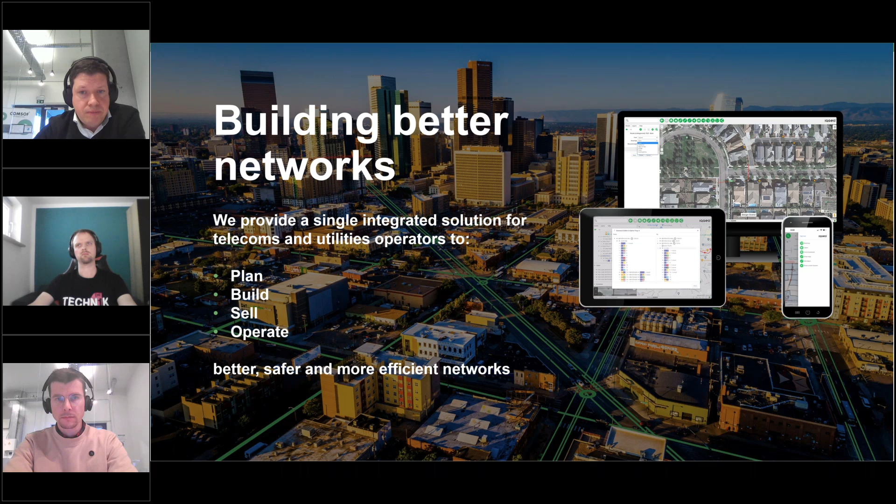Now, for those who are also familiar with Comsof as a company and as a brand, since August '22, IQGeo and Comsof have joined forces. Given the fact that our technologies are very complementary, this now fits into this end-to-end lifecycle story, being one company now with a broad set of solutions, where the Comsof brand mostly reflects the automated design solutions.

As a joint company, we have more than 450 customers across the world and more than 100,000 users that are daily using our software, something we are very proud of. We have more than 300 employees spread across our 8 offices around the world.

I think what differentiates us from some other companies is that we really come from a real understanding of the networks and the support of the workflows. We start from the business problem and look at implementing solutions to solve those business challenges, with a team that has a lot of experience in this domain, spanning the whole life cycle. It's also a system that is very modern, cloud-based, easily supporting mobility workflows, etc.

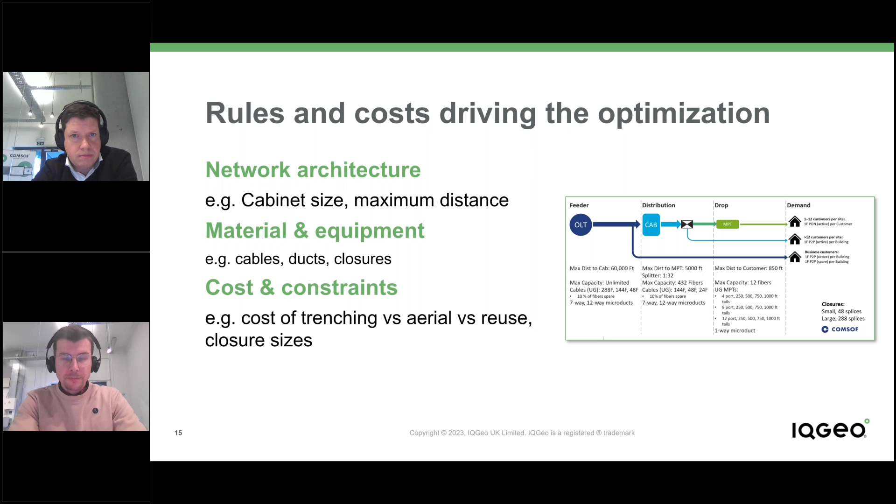And all of that information is considered by the software and is driving the optimization algorithms. Second point is the GIS data. So it's really GIS driven to get to particular detail in accuracy, particular level in accuracy, and it's also driving the cost of the design. So typical GIS input data that's required is land-based data like the addresses, parcels, and streets within your target area.

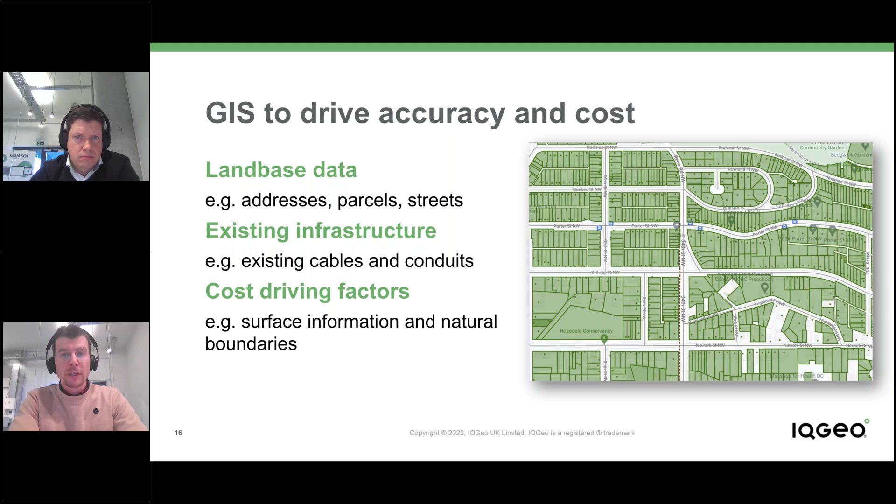Any existing infrastructure is a huge cost driver, as you'll also see in the presentation later on. Reusing existing conduits, existing cables, and structures is a way that costs can be lowered, so that's important that is also taken into account in the design automation. And then other cost driving factors like surface information, natural boundaries, all of that detailed information. The more detail that you provide it, the better the algorithms will work, and the more accurate the cost will be.

As a result of a Comsof fiber calculation, you get very detailed output from the solution out of the box. It gives you a cost breakdown, a complete cost overview of building out your new network, with detailed breakdown of all the equipment, civil works needed, together with volume and total cost. You can do a very detailed analysis and optimize your rules to drive down costs even further.

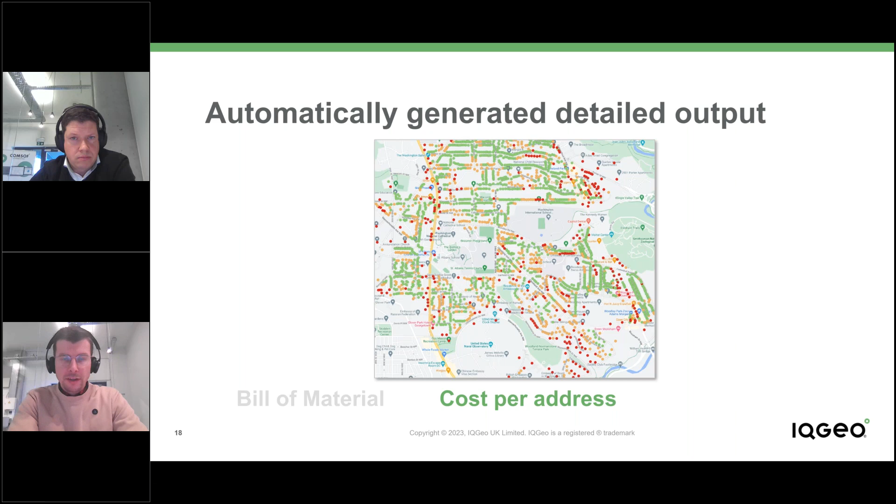This cost information can also be provided even for individual addresses in your target area, driving your decisions to maybe exclude certain homes from an initial rollout and connect them later on, to optimize the budget that you have for targeting a new area.

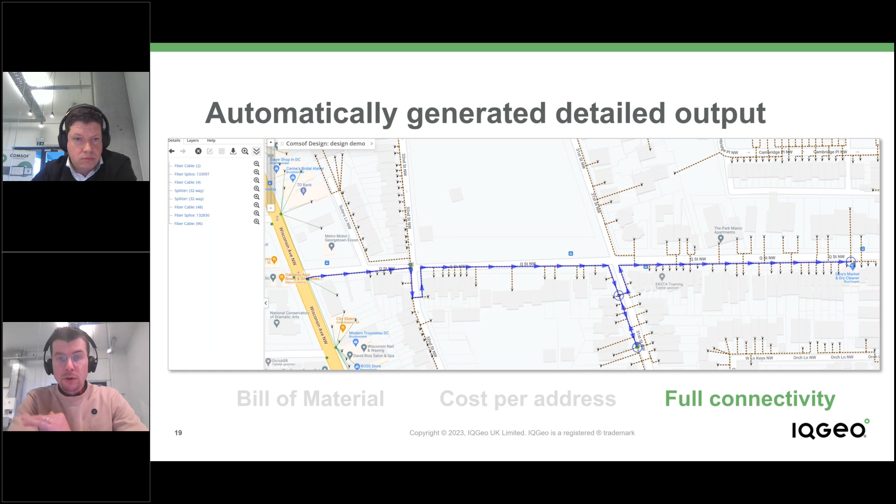What is very important, I think, and helps with increasing accuracy, avoiding errors, and gaining time, is that the output generated by Comsof Fiber is really a detailed design. There's fiber level connectivity allowing you to trace through the network. It's not only providing the equipment you need to build the network, but also which connections are required, like which fibers need to be connected to which other fibers, and which cables in which particular microduct need to be positioned. All of this can be taken into account by the software.

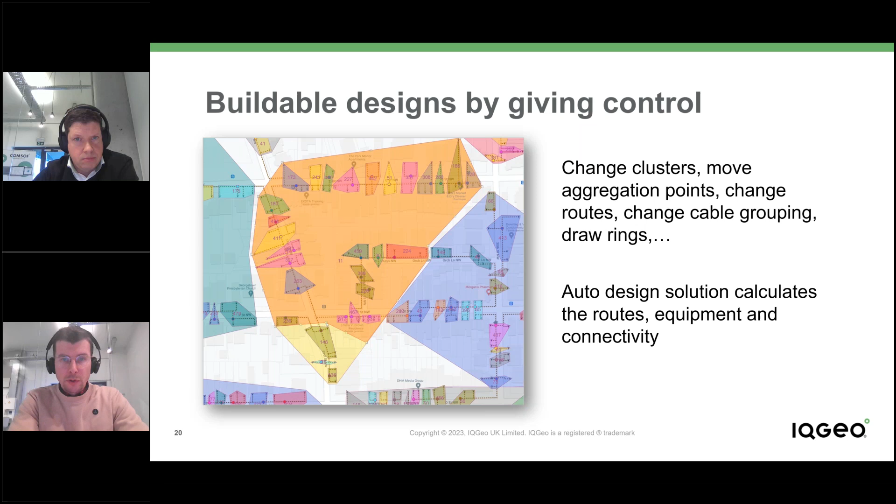Last point, which I think is a key feature when going to low-level design and constructible designs, is giving control to the user. Comsof Fiber is not a black box solution that gives you a design and you need to go with that. No, you can really have control. You can decide where your cabinet location needs to be, which homes are connected to which cabinet, and let the software then do the heavy lifting and decide the connectivity and all the equipment needed to connect all the homes you told it to connect. So you still have that level of control. It's not a black box solution.

With this functionality, we see with our customers that we're offering different types of value. First, it's a time-saving solution, compared to manual design, saving 50 to 90% time in the end-to-end planning and design process. The second point, which is really important, is generating cost-effective design, helping to reduce the build cost of your network, especially when looking to reuse existing infrastructure as efficiently as possible.

A third point is you get better designs - uniform designs. Quality is increased because you have a certain set of rules that need to be followed. If you're making changes to the design and not adhering to the rules, the software notifies you so you can adjust the design accordingly. It also helps avoid mistakes. When doing manual design, it's easy to miss a fiber or choose the wrong type of cable so that you cannot connect homes in a later phase. This is all taken care of by the software.

Lastly, it's cost control. Already in your design phase, in your planning phase, you get a very detailed view of your costs. All costs are generated or calculated based on a real network design following the rules, so the variation in cost between design and build is greatly lowered. You get a lot of confidence in the cost from Comsof fiber design compared to the cost it will take to eventually build the network.

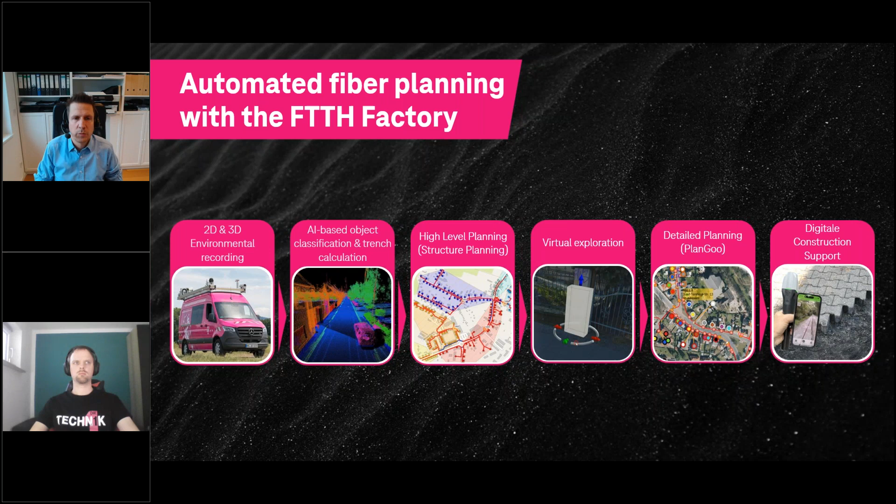Thank you, Bertolt. So our first step in our FTTH factory process is the 3D and 2D environmental recording. We currently have 4 so-called TCARs, the magenta car you see on the screen, driving around all of Germany. This car is equipped with a lot of cameras, GPS receivers, and 3D environmental sensors, so that all details of the construction area are recorded.

Sorry, it's slow coming up.

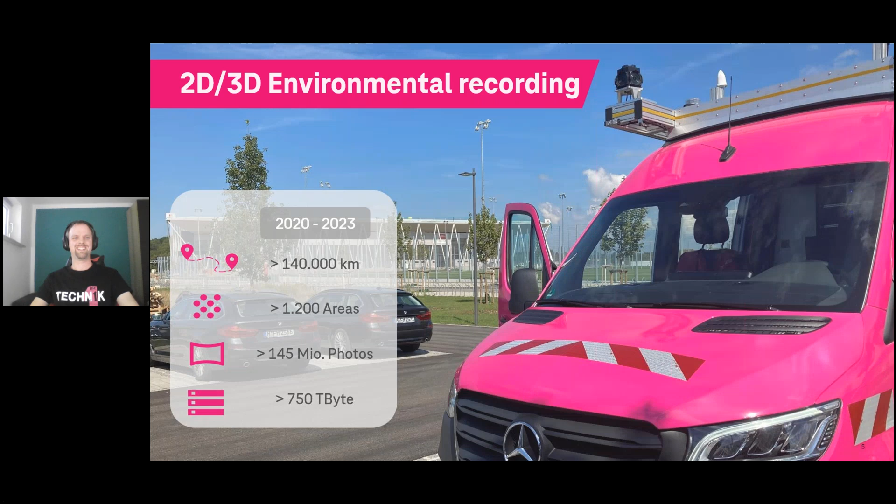Okay, so let's have a closer look at our automated network design, in which we use the Comsof Fiber Designer. The first step is to collect all the data gathered by the TCAR, and this data is processed in an automated way so that there's an automated classification of the surfaces, so we know on which side of the street which surface is present.

There are approximately 30 trained classes for that, for example asphalt, concrete, pavement. All these different surfaces are collected and identified by our automated process. Out of this data, we generate the so-called potential trenches, which are then later used by Comsof. These are the potential ways our FTTH network could be built inside one rollout area.

Of course these surface informations are written to the potential trenches, so we exactly know on which side of the street which surface is present, and how much that side of the street would cost. This information is then passed to our integration of the Comsof Fiber Designer, so we generate a really cost-optimized and good FTTH network design, also utilizing our existing infrastructure.

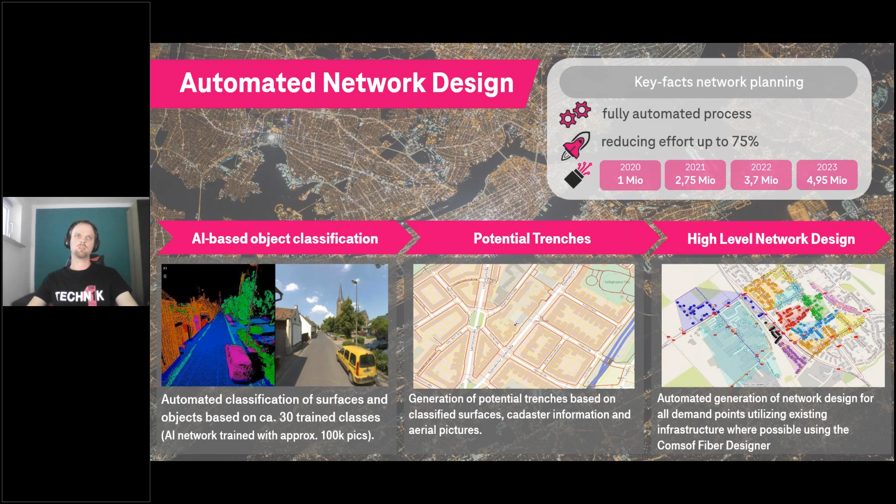And Bertolt, to the next slide. I would give you a little bit of experience here with working together with Comsof.

In Deutsche Telekom, we had the special situation that we already have a lot of existing pipes and previously built fibers in our company. We wanted, of course, to reuse all this existing infrastructure which had been built over the years for our FTTH rollout to reduce cost. There we had pretty challenging things to do with Comsof, because we had a lot of special situations, different conduit types, and so on.

And all this information had to be calculated or had to be taken into account by the Comsof Fiber Designer. I really must say that Comsof did a good job here and gave us a lot of support to understand these different situations and how to handle them in an automated way. So thanks to Comsof again for supporting us here.

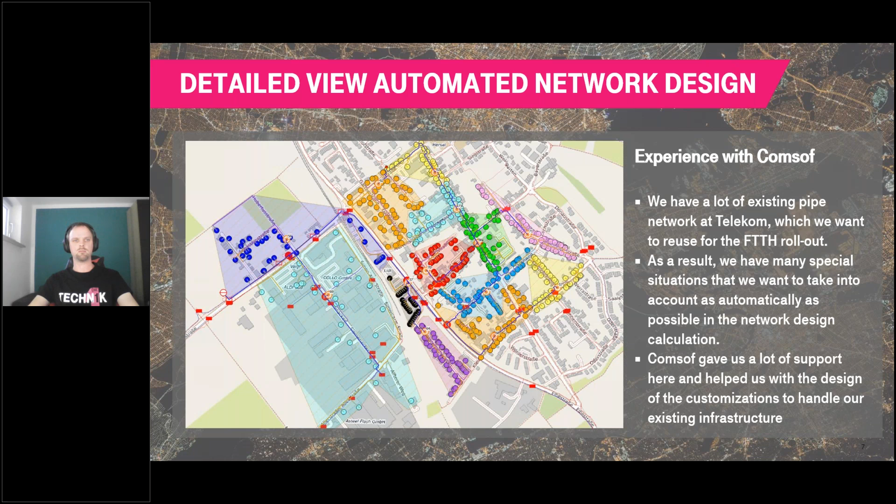So now let's go back to the slides. We generate our FTTH network design here. As you can see on the screen, we have our distribution points, distribution areas - these are the colored polygons and so on. All this network design is calculated automatically, and no telecom employee has to do it manually. Our telecom employees only do a short quality check on this automated network design, and that's all our employees have to do here.

The next step during our automated FTTH rollout process is the so-called Standort- und Wegesicherung - there's no real good English term for it. So we have to ask our local authorities where we can put these cabinets and so on.

And there we also use our gathered data we collect via the cars. We have this tool here, the so-called Fibre3D. With this tool, we can really change the position of each cabinet in a 3D way, so we can really say, okay, we want to place this cabinet here, and no one is blocked by this cabinet and so on.

In previous times, our colleagues always had to drive into town and take these photos manually and also draw this cabinet on a PDF file. We found a nice IT-supported way here so that our colleagues don't have to do this anymore.

And this was also really beneficial during the pandemic, so we could coordinate the locations of these cabinets together with the local councils via the internet, and no one had to meet on-site. What we do here is approve these locations with the local authorities, and then we transfer these locations back to the Comsof designer, so that these changed locations are taken into account in a new network design.

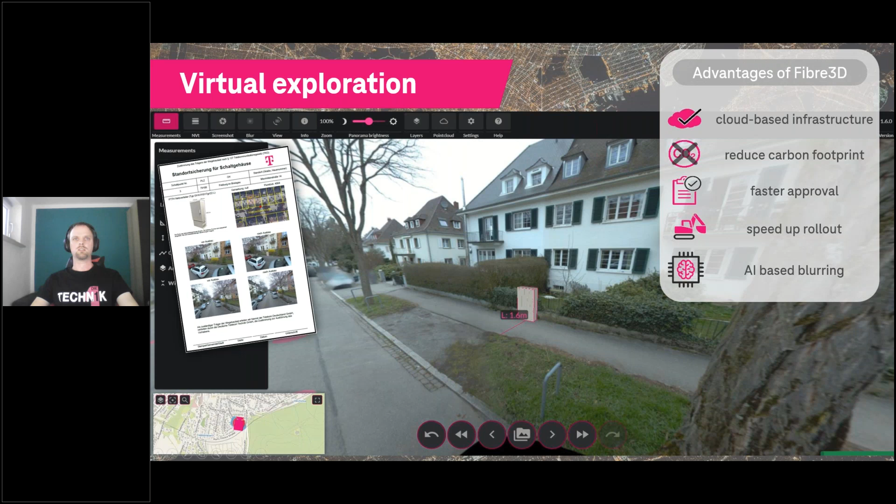Yeah, on the next slide - the last step of our planning process. After all of our locations and paths and so on were approved by the local authorities, we go to the detailed planning. This software is the so-called PlanGo, based on QGIS. It's a telecom-made, telecom-tailored solution for detailed planning, where we just import the network design created by Comsof.

The main thing the users do in this detailed planning is just change a little bit, if necessary, on the network design - just small things. As soon as some bigger changes are necessary, then of course we reuse the Comsof designer to just generate a new network design. And we also generate the construction documents out of the software.

And the last thing that I wanted to show you here is that the software is multi-tenant, so also externals or other companies which work together with Deutsche Telekom can reuse the software.

And the effort here has also been pretty reduced, because with our old detailed planning software, for an equal construction area, an employee would work up to 300 working days on the design until the construction documents are generated. Now we could reduce this effort to an average of 30 days, because Comsof is calculating so many components inside this network. We know where each fiber is going and how it's connected, so we could reduce this effort up to 90%, down to 30 man days.

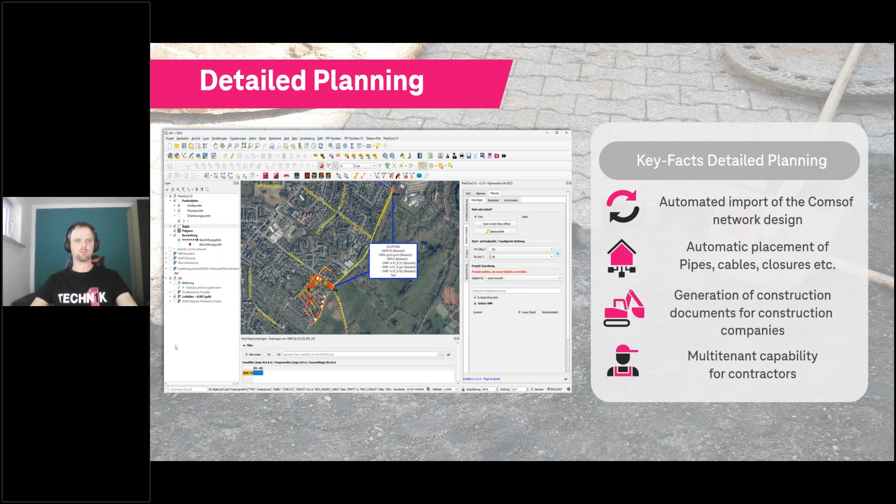And the next step in our FTTH planning process would be the digital trench recording. And here I would hand back over to Bertolt. Thank you, thanks a lot, Henning.

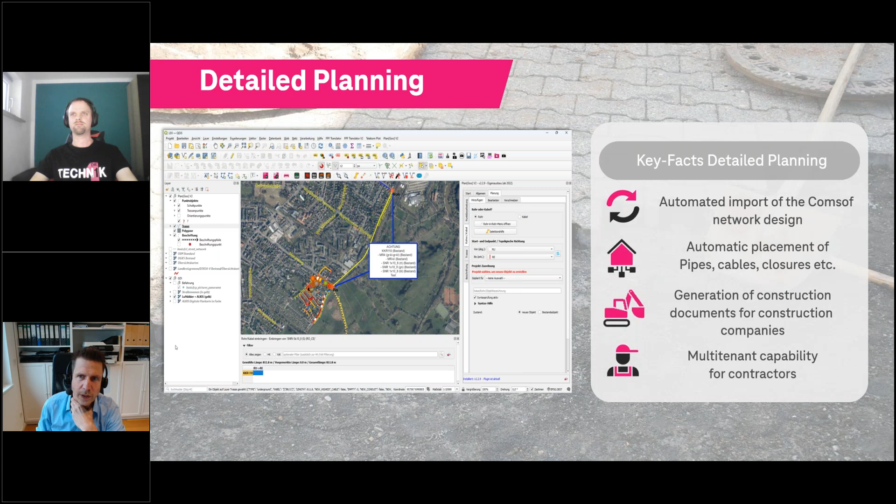So yes, the next step is basically the digital construction support, which consists of two main components. On one hand, we have a mobile application. Together with a partner, we implemented a system called GeoAce, which supports the automatic measurement of open trenches and open constructions.

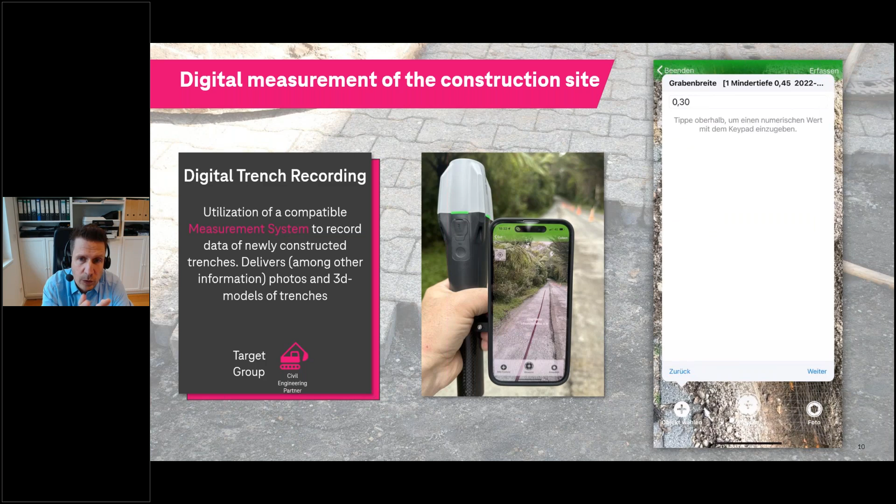You basically just have a mobile phone, you walk along the trench or the open construction, and it records using the LiDAR scan of the iPhone. It records the trench three-dimensionally and captures relevant data, supporting submission of that into our web app. There are also alternative solutions available for this.

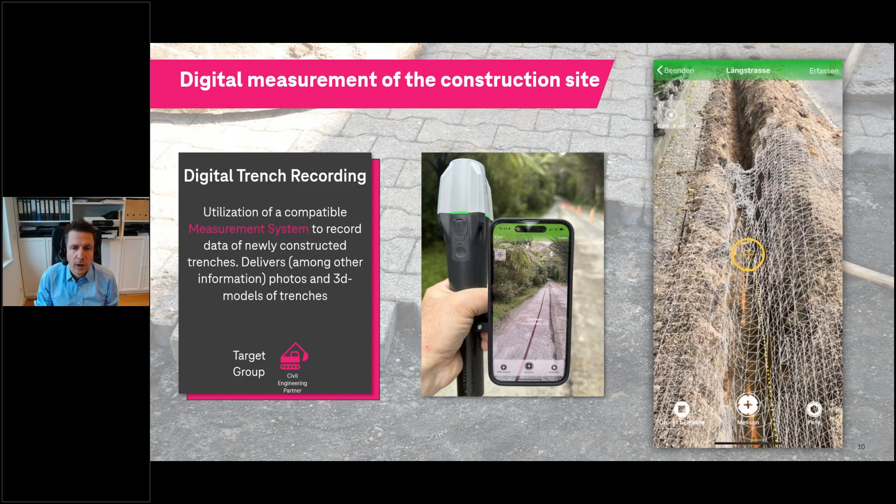So we support GeoAce, the one we work together with our partner with, but there's also Deep Up, and potentially in the future other solutions that we would support. That data is then submitted, once captured, into our digital construction web app.

So the benefit of this whole solution for us is that on the civil engineering side, it's a much easier and more streamlined process to actually get the data to us. You don't need a field surveyor in every instance. In most cases, it's sufficient to just take this application, scan the trench, and submit the data to us.

In this web application, where the data is received on our end, our construction supervisors work with it and see directly the current state of the construction. It's live progress monitoring. We can identify which construction method has been used, directly see all the images taken in the field, see what was the planned network and where deviations occurred, and see the meter measurements. It basically gives us the overview of the complete construction happening in the field.

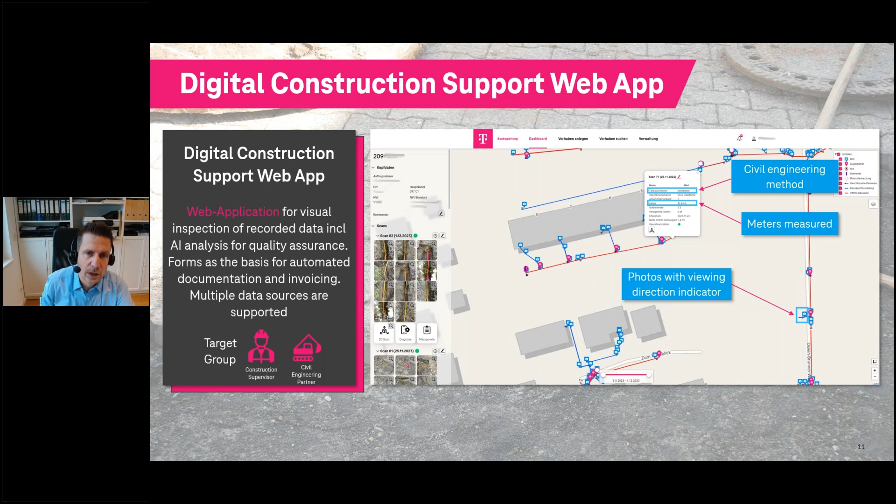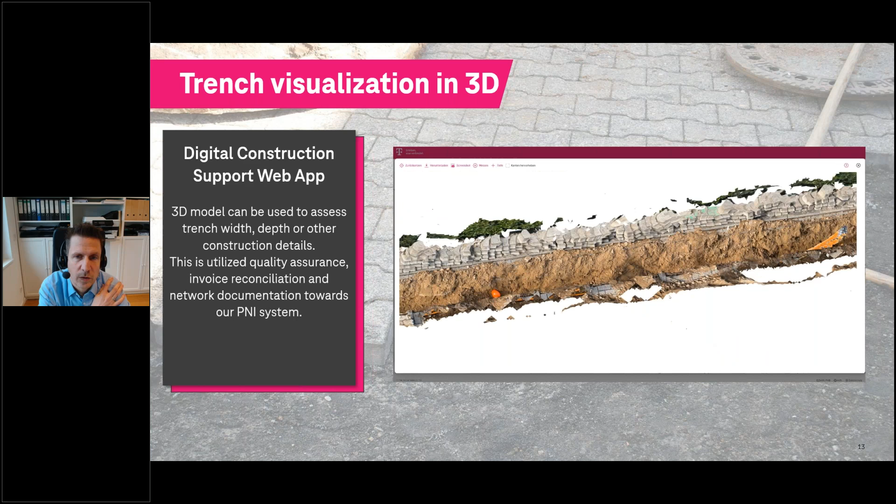And also in cases where we need more details, for example quality assurance on what has really been constructed, we can dig into the information directly, the data provided by this application to the web app, and go directly into the trench and do measurements. Has the construction really been as deep as we asked for? Is the trench as wide as submitted in the invoice? So it helps us doing quality assurance, helps us doing reconciliations of the invoicing process.

And it's also later used for the documentation process towards our physical network inventory. So in case of questions, we can always dig into more details on how the trench actually looked like when it was still open.

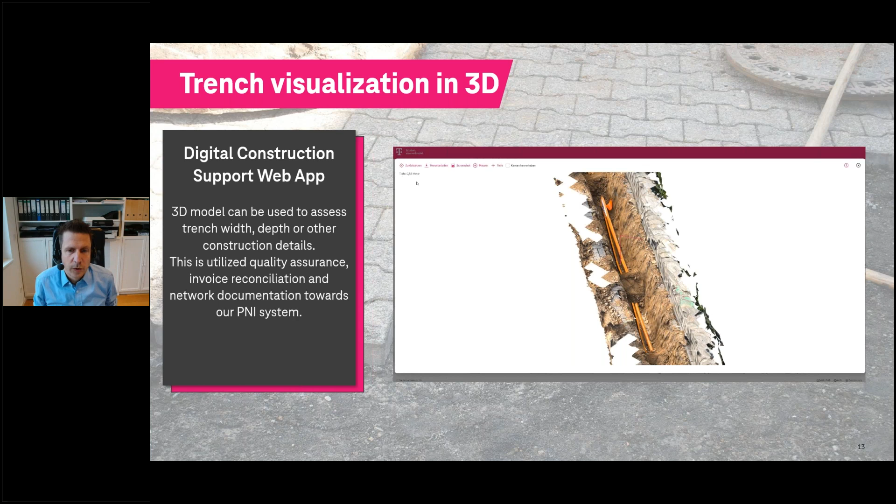And that was basically, in a nutshell, the quick run through of the entire program of the FTTH factory. And with that, I would pass back over to you, Ralph.

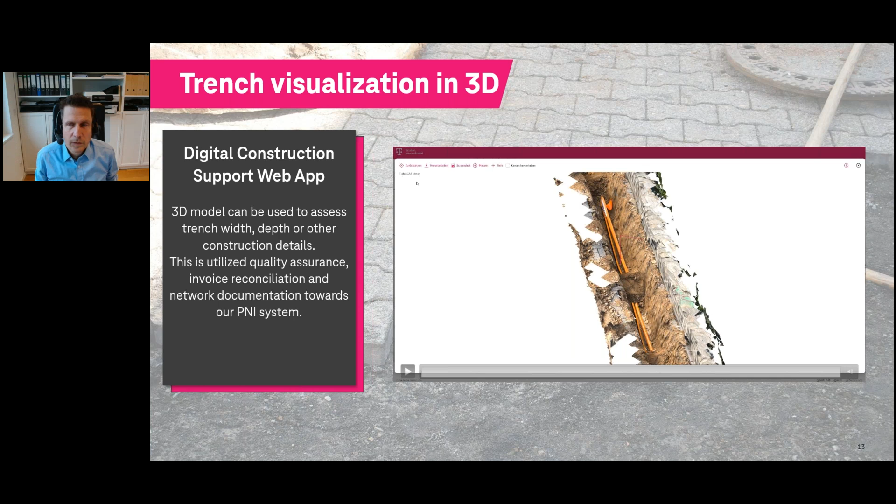Yes, thank you, Bertolt, thank you very much for that run through. It's really interesting to see how this process was further improved and how the end-to-end combination of these technologies really helped you automate the process. So I would just summarize some of the key takeaways here.

I think when we started this project, having an ambition to go into millions, at 3, 4, 5 million, we've actually seen that throughput reached now for FTTH design. At the beginning this was, of course, very challenging. These are big numbers, and it's great to see that we achieved that by working on the whole automation of the processes. That has resulted in several reductions. We've heard a lot of different numbers. I'm highlighting here a 75% reduction in the design effort, but obviously there's a lot of optimizations in a lot of processes, which really show the potential of this kind of technology.

And last but not least, I think it's great how you showed the importance of gathering data at high quality, and how that helps to improve the overall quality of what you're generating in your process, and drives the efficiency of the processes. So thanks for sharing that.